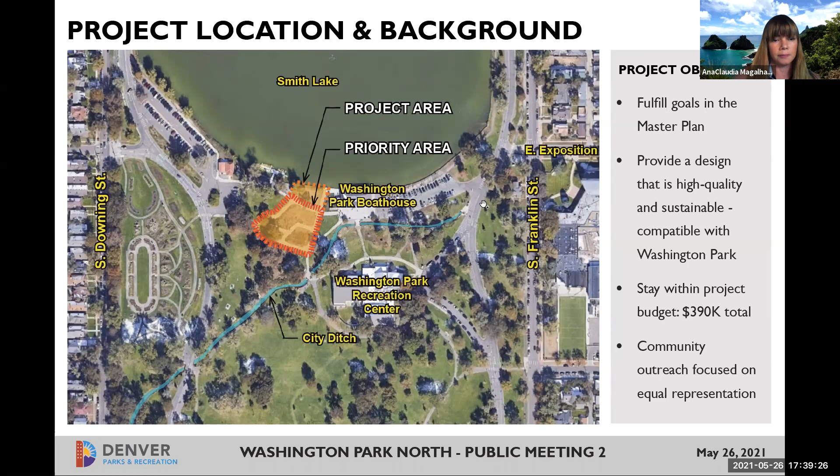I want to clarify that the project area highlighted here was an important design exercise for us because we really wanted to study the lake edge and how we could activate that. But because of our project constraints, budget, and limited scope, we are only improving the priority area highlighted here.

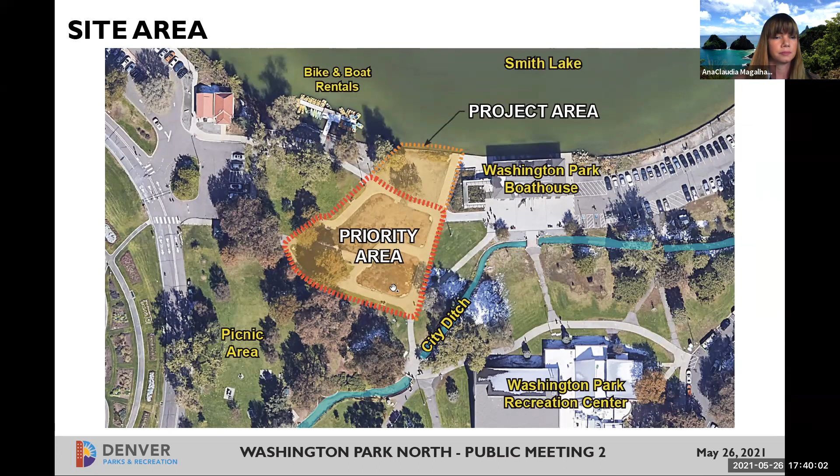I also want to remind everyone of some key existing conditions here. We have really good views of the park, and if you're familiar with this area, this was the former North Playgrounds. The existing circulation of this area will mainly remain, and we are trying to activate what was the location of the play pits. One thing to note is that it's not really visible to park users, but there's a lot of infrastructure and other studies we did to understand how we could implement water here, which I'll elaborate on in a different slide.

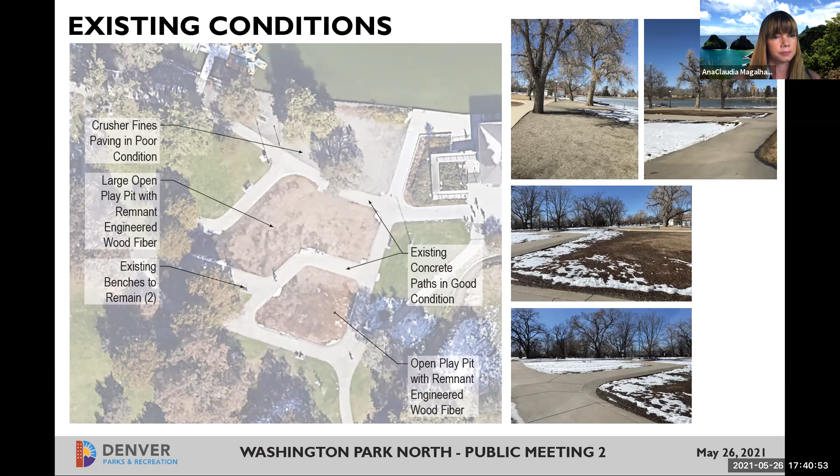I quickly want to go over our first public meeting and the feedback we received so far. We showed the community two concept designs, and this was really a visual tool we produced to get feedback from the community. Concept A and Concept B came from the strong foundation of our Park 2011 master plan, and also from our placemaking survey launched with the community, which received a high number of responses. That survey opened up a lot of opportunities for the community to express what they'd like to see here, and that feedback gave us starting points for design ideas to present to the community, so we could continue getting feedback on whether our design ideas represented what the community wanted.

I also want to highlight that based on our second survey, launched after the public meeting, Concept B was highly favored over Concept A, even though we did not ask the community to rate between the two. Based on the specific feedback we received, we felt that Concept B was very strong within the community feedback.

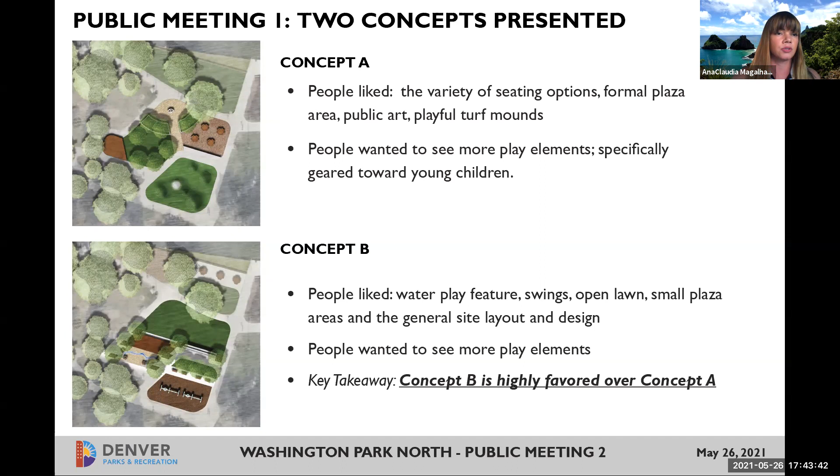We also heard very loud and clear that the community really needs to understand how this project came about. So we thought this information was really important to this community and to everyone seeing this today. If you're joining us for the first time, I want to give you a little background on what really made us be here today with the design.

It's really a balancing act of how many things we need to consider before we present a final design. As you can see here, we start somewhere, and with our parks, with a regional park like Wash Park, we do have a master plan to guide the development of the park today. So we have that as a foundation. And of course, we go back to very specific community outreach and feedback to help us further define what amenities really speak to the community today. Based on that feedback, we felt we really adjusted and customized this project.

We went back with multiple points of community outreach. We did two surveys, and this is our second public meeting. We met with our city council representatives, and we also met with RNOs to guide us on that community feedback, to make sure we were balancing all these factors you see on this screen. It's not just a one-sided design approach—it's really a balancing act, and we try to bring the community into this multi-step process.

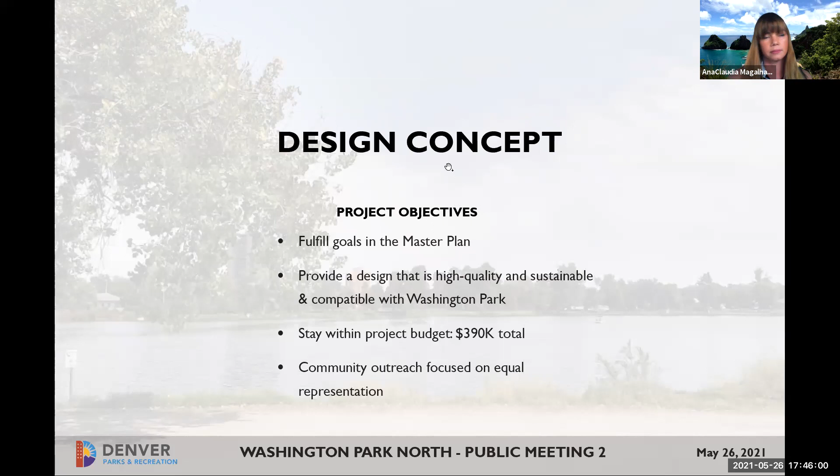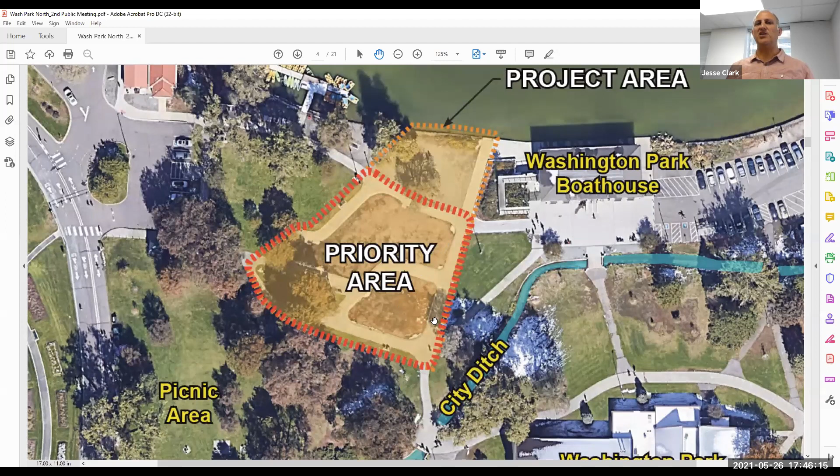There was a question regarding what was included in the budget area, and I thought I'd clarify really quickly. Hopefully this helps: the project area we are studying is the area outlined in both red and orange, and the priority area is the area identified in red. Hopefully that clarifies that question.

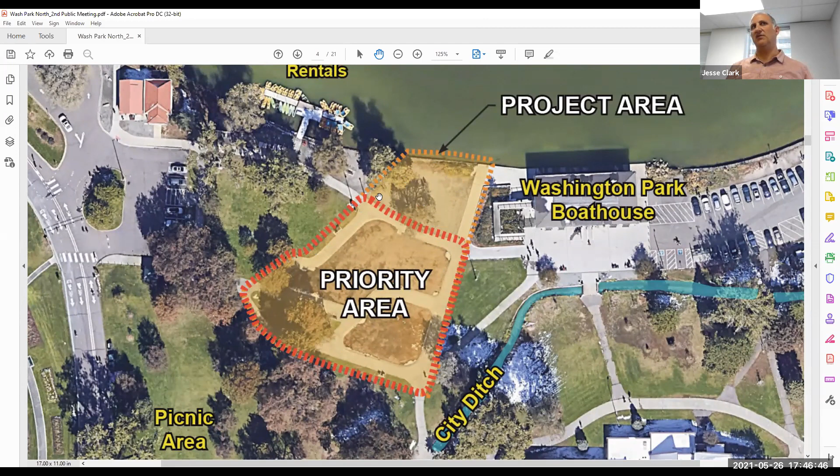As AnaClaudia mentioned, we want to make sure we're considering all of the associations with the boathouse, certainly parking and the shoreline, etc. Really, I think budget determines how much of that portion of the project will be feasible. Hopefully that helps.

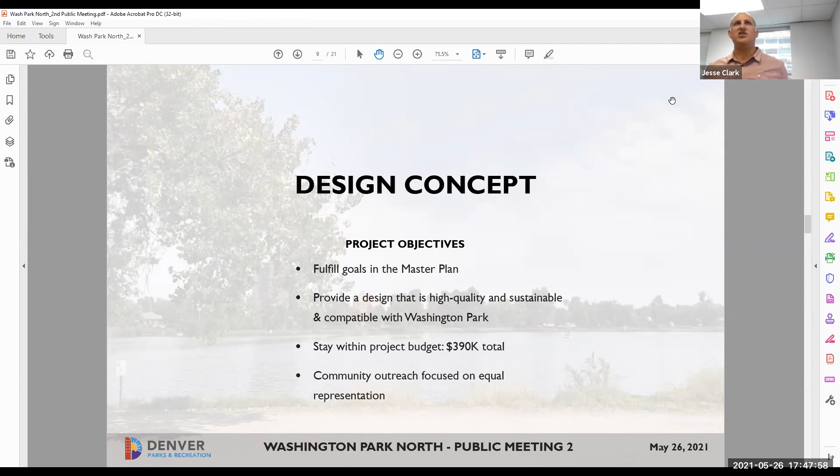All right, I bet you're all just sitting there going, just show us the concepts. As AnaClaudia mentioned, there have been a lot of different influences on how we're getting to the design ideas. We've gotten fantastic ideas from everybody, with really great participation in surveys online. We also got fantastic ideas from the community through the steering committee and some community members who volunteered ideas. That was really great, and we appreciate it. So, concept B from the original push was preferred.

I'm going to show you two different variations of concept B, but first I want to point out that the area in red here is going to be consistent in each of the concepts. What you're seeing in the area in red is basically concept B with some adaptations made based on feedback we got from the community, from operations, and all of the different influences mentioned.

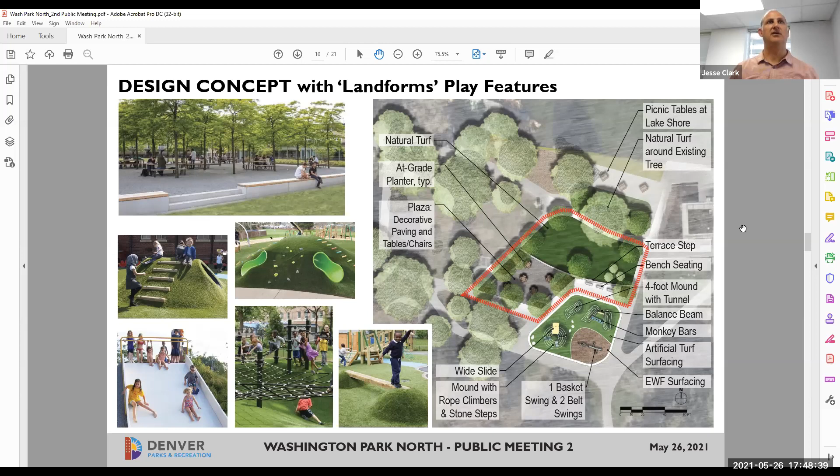Oh, thank you. Sorry, there we go. Better? Okay.

At any rate, the area inside red will remain consistent between the two concepts, and then the area outside of the red is the area that's been identified for more play features, etc. Based on a lot of the community input we got, we heard people were really interested in seeing more play opportunities for the younger children, etc.

So without further ado, let me go through these a little bit. I'm going to erase that so it's easier to see. To give you an idea of the vision for this plaza area, there's an image on the upper left that illustrates what that area could look like. There's quite a bit of grade in there, meaning there's a hill going from top to bottom.

The vision here is to bring in more trees to further bolster that natural shade in the area. On the screen, the lighter trees are the existing trees, and these darker, smaller symbols are potentially new proposed trees in that plaza area.

The play area in this lower right area, we're calling this concept a landforms concept. In the landforms concept, that area would predominantly be made of artificial turf and artificial landforms that kids can climb all over. You can integrate slides, net features, maybe some balancing or skills features, maybe even tunnels if we have the room and the budget to accommodate that.

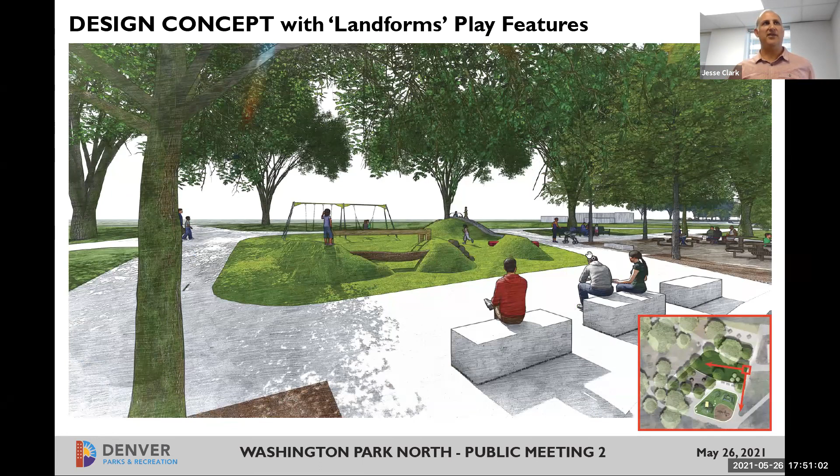We've put together some imagery to help you see what this concept would look like. Down here you can kind of see where you'd be standing, down next to the boathouse, looking back up the hill to the southwest. You can see what that landform play area would look like, swings in the background, some additional seating, and that shady plaza area off on the right.

Just looking at it from a different direction, kind of at the top of the hill, looking down, you can sort of see a hint of the boathouse in the background, the lake in the background here, just another view. You can see the scale of what that plaza area would look like and how the landforms and maybe an at-grade slide might be integrated.

Again, here are those swings. Just one more view to give you a little bit of a frame of reference. These benches are actually existing on that southwest corner edge of the play area. So here's that plaza play area again, lake off to the left. So that's the landforms concept.

The second concept is called playhouses. And again, this area in the red polygon is consistent. I won't spend any time on that portion of it, but again, if there are questions on it, when I'm done showing this concept, we can talk about these a little bit.

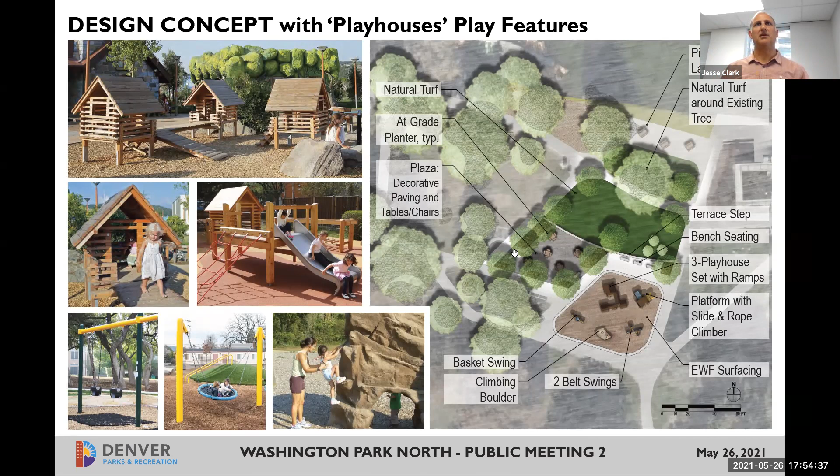So here's a couple of images of what this area might look like. Again, this is looking at it kind of down by the boathouse. You can see the scale of, we're proposing three of these little playhouses here. See the swings in the background, the plaza area to the right. Again, looking from the top of the hill towards the lake in the background.

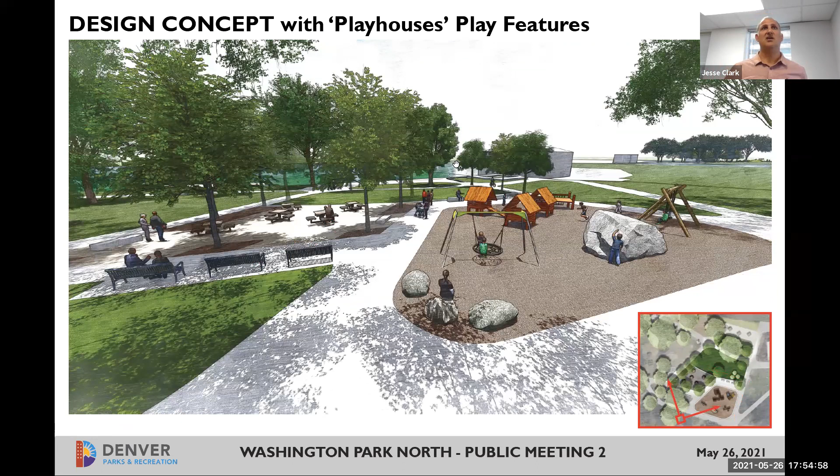And looking from the west towards the boathouse. You can see the scale of plaza area, the turf area down here, and the play area in the background.

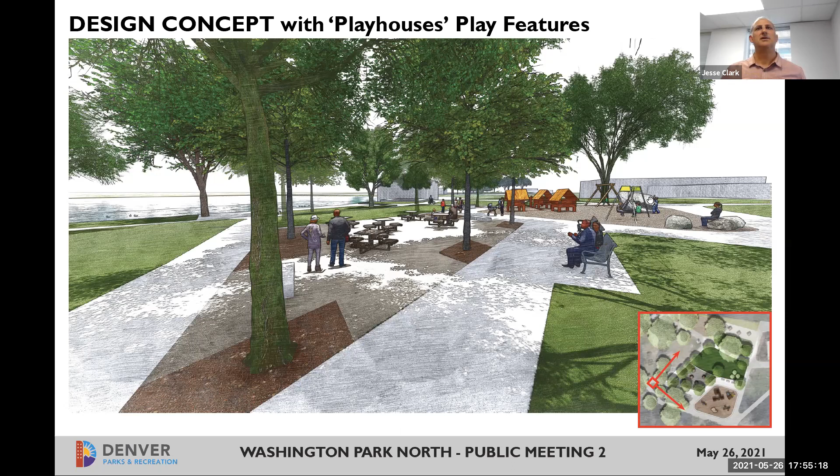So what we're going to ask you to do, and we're going to take a break here and see if there are any questions or comments or thoughts here, but we are going to ask for your opinion on whether you prefer the play area in the Landforms alternative or the play area in the Playhouse's alternative. So these two concepts, everything outside of that, the two concepts are the same, and a reminder.

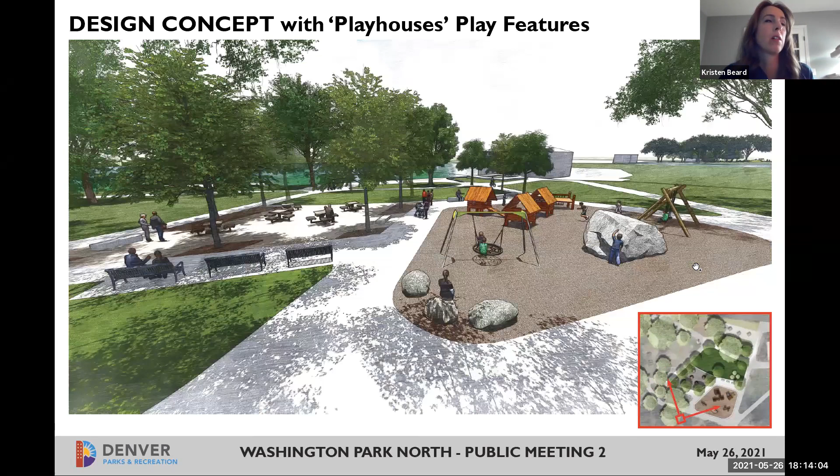Just to add on to that, Claudia gave a good overview of how we came to this conclusion. Knowing that Wash Park is a very desired space that people, not only in the community, but regionally, use, we're trying to balance all of the needs and requests and what really would complement the other infrastructure around that space, like the boathouse and the different elements around there.

Knowing that Denver has changed a lot over the last 5 years, even more than that, we are taking other elements into consideration. Knowing that the diagonal is very well used doesn't preclude us from looking at different areas to add another playground. But in this location, we are following the master plan, working with Denver Parks and Recreation, maintenance and operations, getting feedback from surveys and public meetings, and trying to really balance it all with the current infrastructure in place.

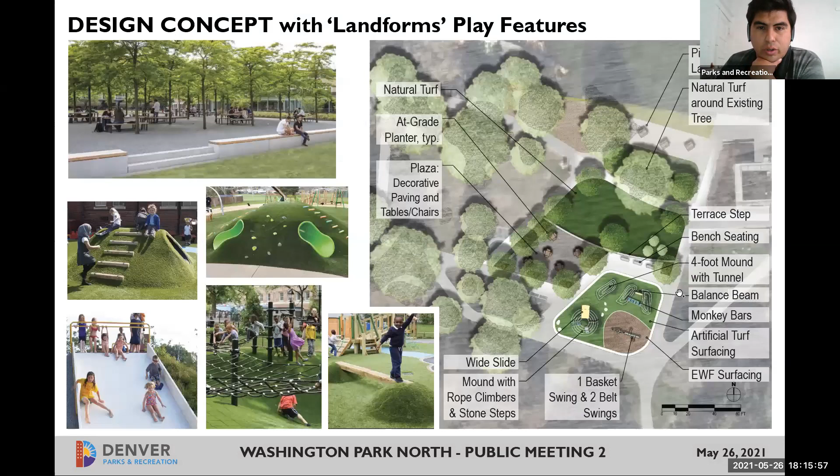Thank you, Liz. We definitely understand the desire for that type of playground. But as you can see, there's a variety of different things that are being balanced by our project management team.

And expanding and listening to the community to provide that extra play area here. But Tim has a question in the chat about the Robinia Forest wood pillars, which were purchased for the diagonal playground but were never used and are now in storage. Could those be used in any way?

Yeah, I'll address that. Tim's got a little bit of background. Tim, thanks for the question. So some of you may recall that there was a feature in the diagonal playground called the Robinia Forest, named after the type of wood I was describing when William asked his question.

Those Robinia wood pillars, or elements, are indeed being stored, and we are thinking of ways that those might be integrated. I can't tell you that they will be. There is still some desire for those to be retrofitted into the original diagonal area. But I can tell you the department is wanting to use those. We just haven't decided what the best use of those materials is yet.

So Tim, I don't know if you want to discuss it anymore, but that's a great question. We are thinking about it. It's possible that when we get into the details of the final design, we'll try to integrate those materials either here, or again, it would be retrofitted into the diagonal area.

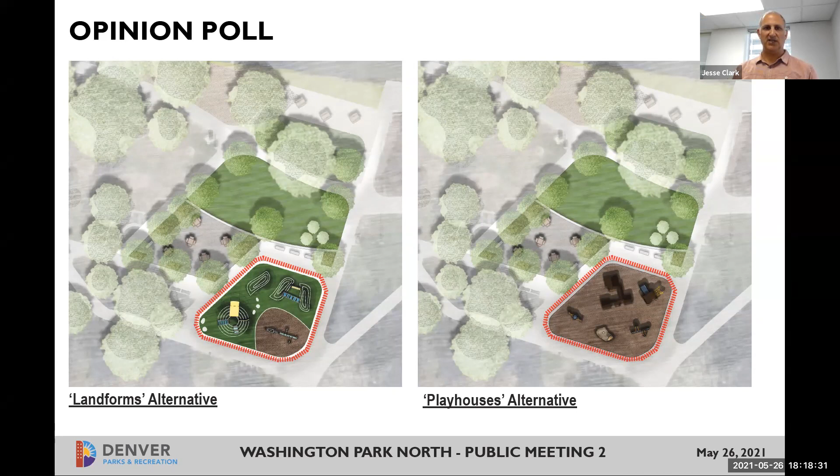Okay, so there should be a poll on your screen. It's pretty simple. And if the box is blocking your screen, you can move it to the side if you want to review the different alternatives if needed. So the box is movable.

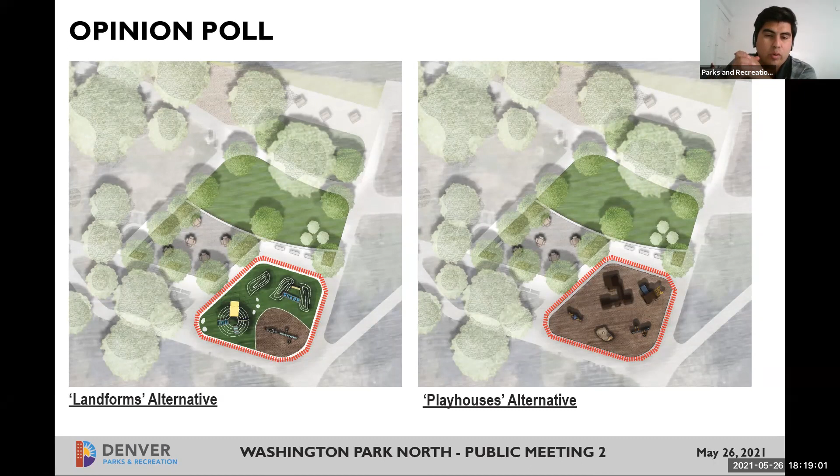Okay, we'll give about another 5 seconds. So we will end the polling and share the results. It looks like the Landforms option is, at least within those present here, the more popular of the two options.

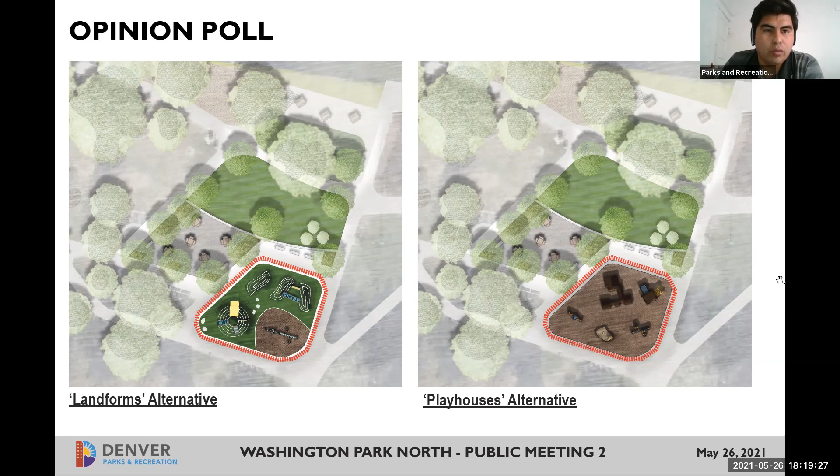The final design will be available in June this year. And then we'll be able to advance with construction documents and move to project implementation in late 2021, 2022.